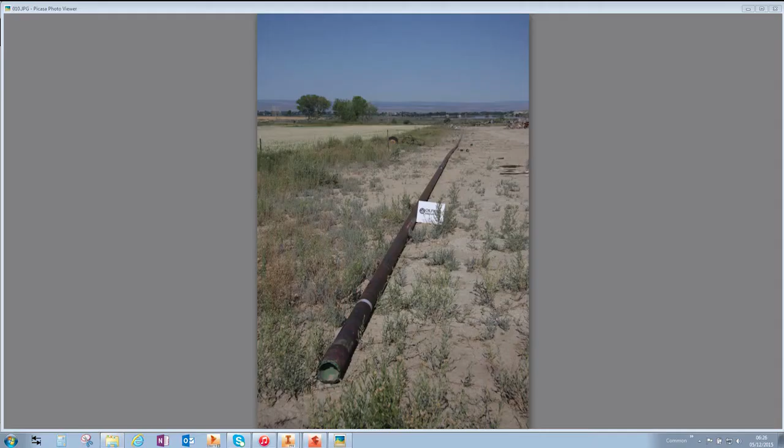We're experts with over 30 years of experience in well operations, and we've patented and tested the worst case downhole tubing disposal situation. We verified our patented method of downhole tubing disposal by crushing and compacting 2 3/8 inch API tubing within horizontal 5.5 inch API casing using equipment you can find at your local garden center. Here we show 5.5 inch casing lying horizontally on the ground.

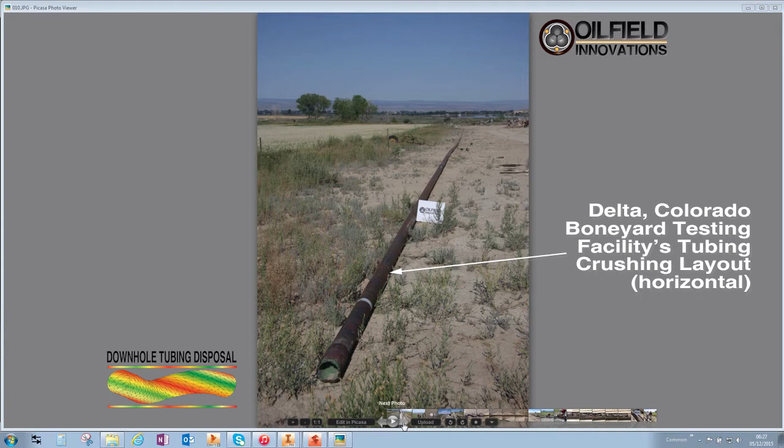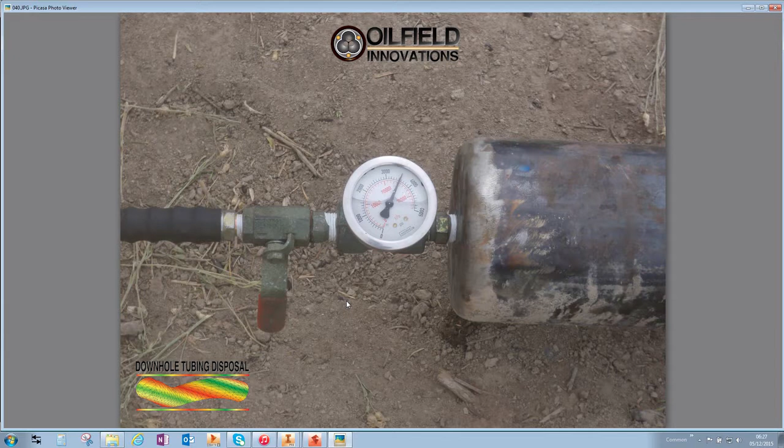The process of verifying our patented method consisted of splitting the tubing, inserting the split tubing into the horizontal casing, then placing a piston and a cap on one end of the casing. We then use an ordinary garden pressure washer to pressurize the casing, push the piston, and compact the split tubing. With a cap holding the split tubing on the other end, we used water to pressurize the piston and crush the tubing using around 3,500 psi or 240 bars of pressure, which was the garden pressure washer's maximum rating.

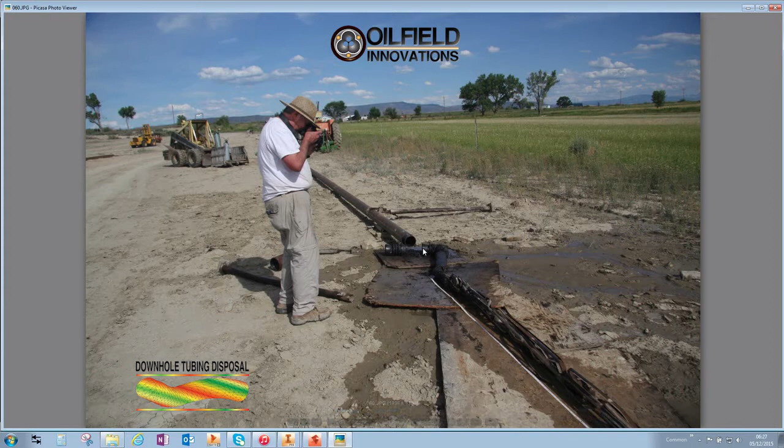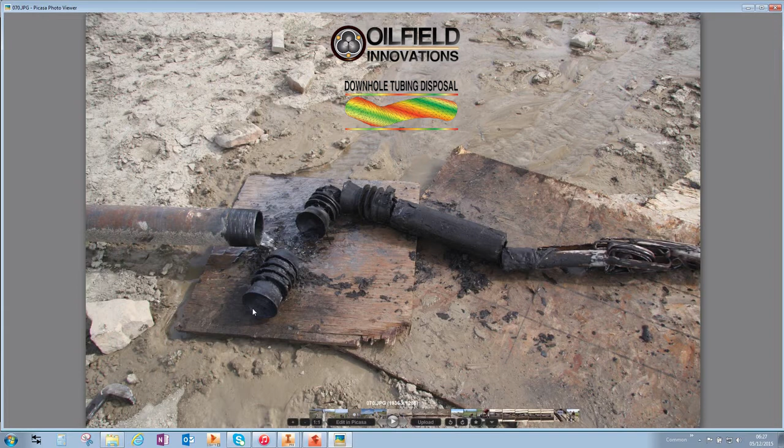Compacting split tubing takes significantly less pressure because you only need to drive one piece of tubing into a lower split piece of tubing. But our garden power washer could not deliver the volume of oilfield pumps, so we let it take its time until it reached the maximum pressure, and then we stopped the process. We then removed the cap holding the tubing and pushed the tubing from the casing by pumping against the crushing piston with the power washer. We used a piece of pipe as a piston and cement wiper plugs as seals behind the piston.

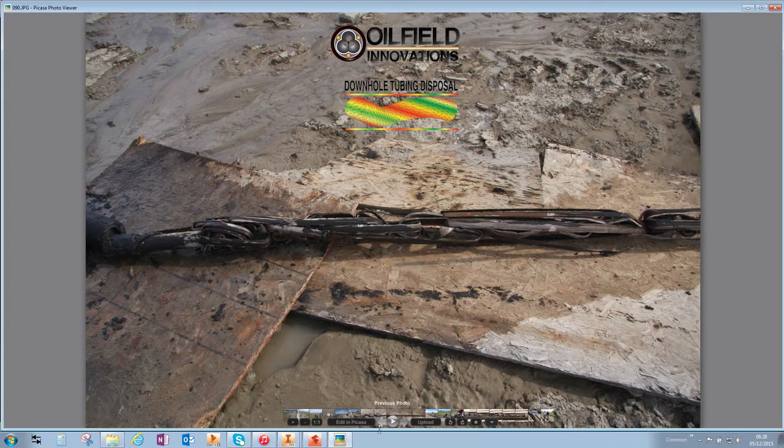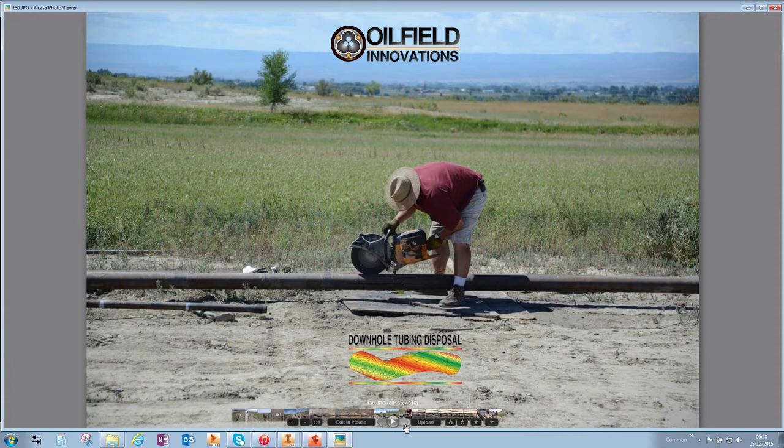We experimented with various tubing splits and determined that after the first split, the compression ratio with a high friction factor of dry crushing horizontally was about 50% compaction ratio using the garden power washer. As the tubing often expanded after being ejected from the casing, we decided to cut a window in one of the specimens to see how it would look downhole within a well. Using a saw, I cut a window in the casing.

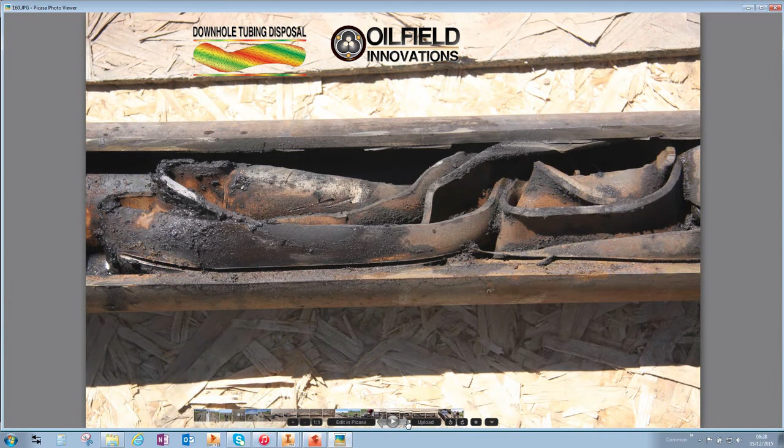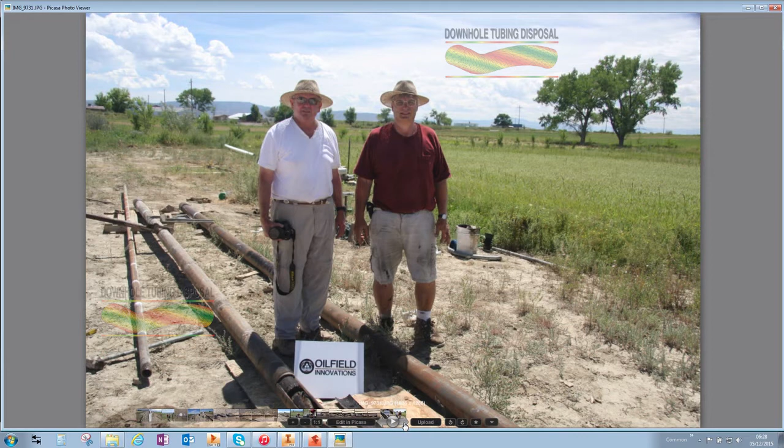As you can see, using gardening tools, we verified our patented method by dry crushing the tubing horizontally, which is obviously the worst case, since compaction will almost always be aided by gravity and an inclined well bore, with well fluids lubricating the compaction process. While alleged experts intent on using or selling the services of a drilling rig may criticize or question our process, you don't have to be a rocket scientist to understand that if you can compact API tubulars in your backyard with gardening tools, it can be more easily accomplished with proper oilfield equipment.

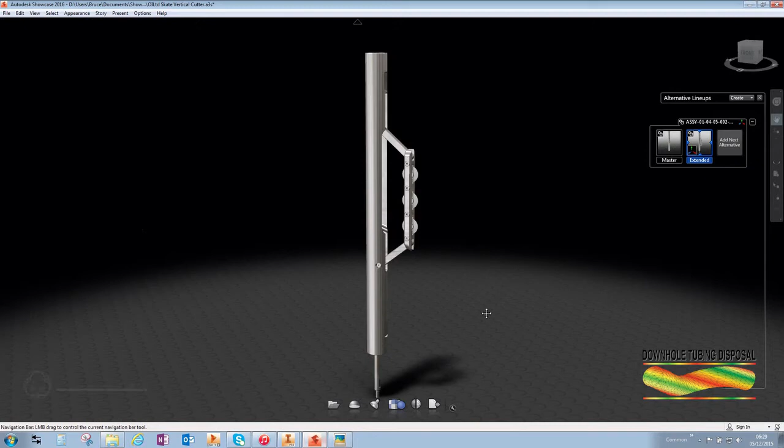Now that you know how easy API tubulars can be compacted after they are split, let's look how we split or shred the tubing or casing downhole. This is our patented skate vertical cutter, which can be lowered into the well, extended, and lifted up and down to split or shred the tubing prior to retracting the cutter and hoisting it out of the well.

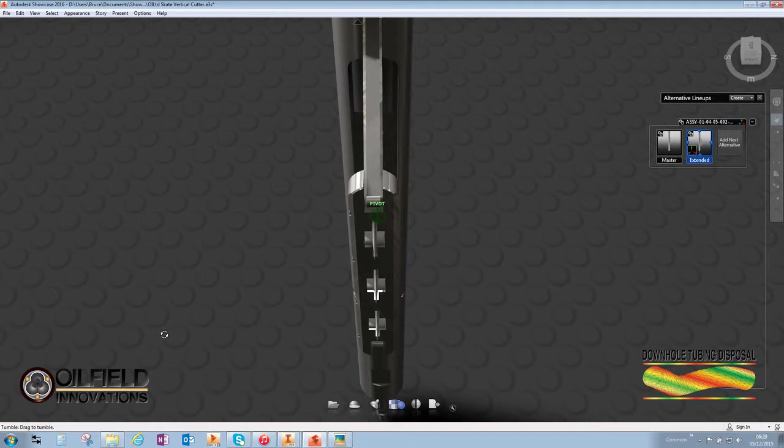At Oilfield Innovations, we use state-of-the-art software to design our patents and tools in a virtual 3D environment. Virtually modeling the tools allows us to see the end product before it is built. It also allows us to run stress analysis to ensure sturdy and robust tools. You can easily see functionality. For example, you can see that pushing the central piston down extends the tool, and pushing the central piston upwards retracts the tool.

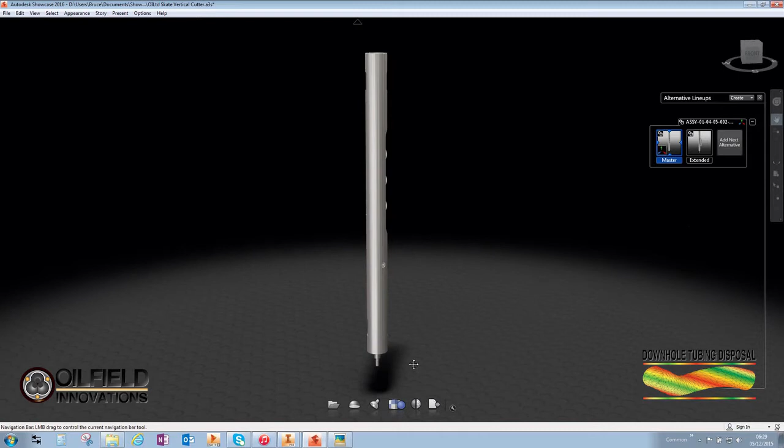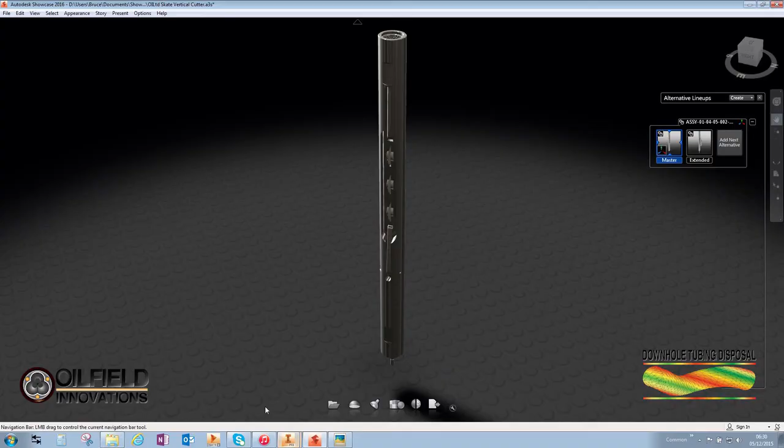Our vertical cutter is designed to be stacked and aligned so that one of these tools can be stacked on top of another, with a central piston extending between the tools. Pushing the top vertical cutter central piston downwards actuates the vertical cutter, and any vertical cutters engaged to the bottom of the upper vertical cutter, whereby when the bottom vertical cutter's central piston is pushed upwards, it pushes and retracts any vertical cutters above it.

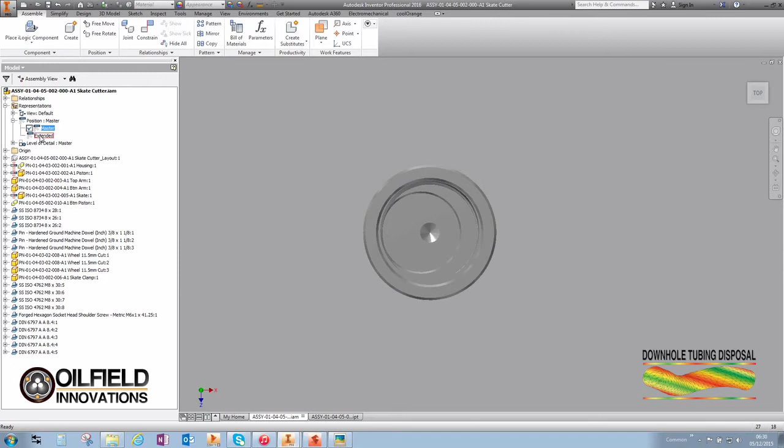We use various high-resolution graphics packages together with Autodesk's state-of-the-art engineering product design suite to model every component of our tool in machining tolerances in 3 dimensions. This 60 millimeter tool is designed to be run on slick lines so it can be extended and hoisted between selected depths to roll cutting wheels capable of cutting any API grade tubular. Now that we've looked at the external part, let's look a little bit more at the internal parts of our cutter.

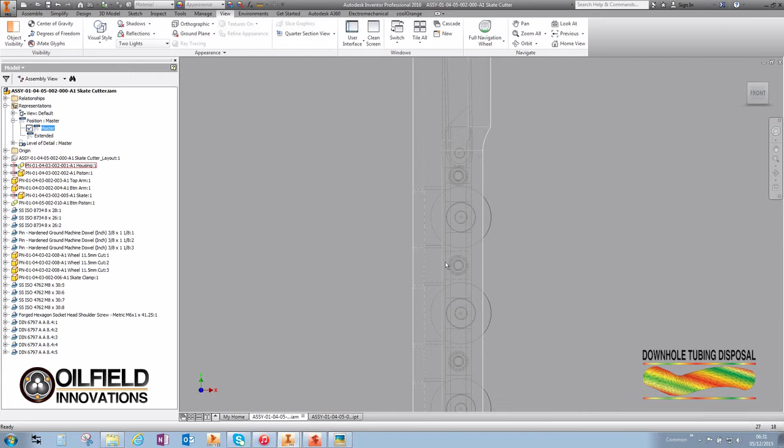Changing a few settings, we can look inside the tool to see how it works. As you can see, it's critical to fit the various bolts and pins between the relatively large 3 cutting wheels. The pins act as axles for the upper arm and the cutting wheel, with an intermediate securing bolt.

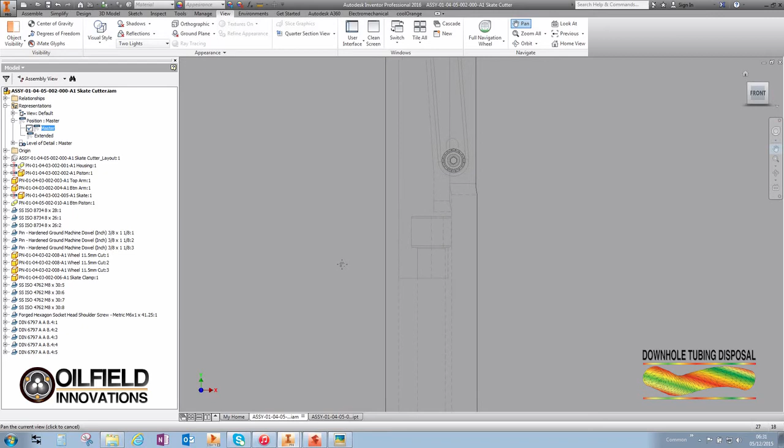Independent larger and smaller diameter actuation shafts within the cutter allow makeup of the internal shafts prior to making up the larger diameter threads of the housing. The lower, smaller diameter actuation shaft slots into the larger diameter skate actuation shaft to allow independent rotation and makeup of the internal series.

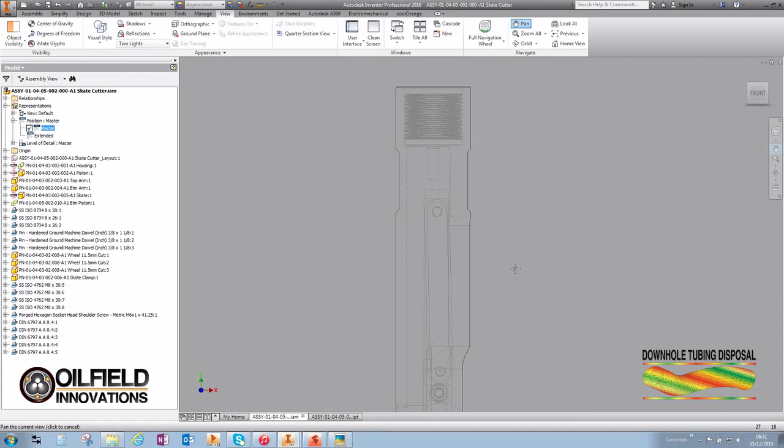The lower arm of the skate is secured between the skate actuation shaft and the cutter's housing, while the upper skate arm is secured between the skate actuation shaft and the skate. An upper actuation shaft from either the spring drive actuator or another vertical cutter screws into the skate actuation shaft, which is pushed downwards to actuate the vertical cutter and engage the cutting wheels to the tubing or casing.

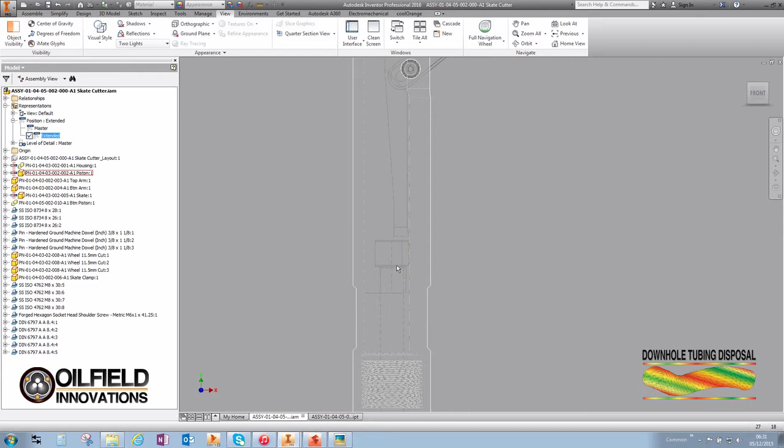During assembly, the skate shaft and upper arm are inserted into the housing prior to extending the upper arm to attach the skate and lower arm, which is secured to the housing via a bolt. With the skate extended, the lower actuation shaft extends from the housing for connection to the next part of the assembly and can be rotated independently via a slot connection.

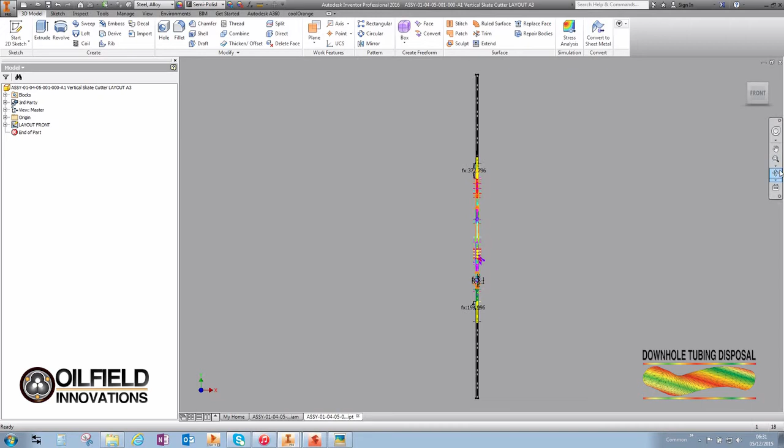Underneath the high-resolution model are layouts with tolerances and dimensions for the entire skate vertical cutter assembly to accelerate the development process. Here we have modeled a third-party tool that can be used to actuate our spring drive system downhole. Compression springs within our spring drive actuator are compressed by the third-party tool so that the skate cutter is extended by a constant controlled spring force.

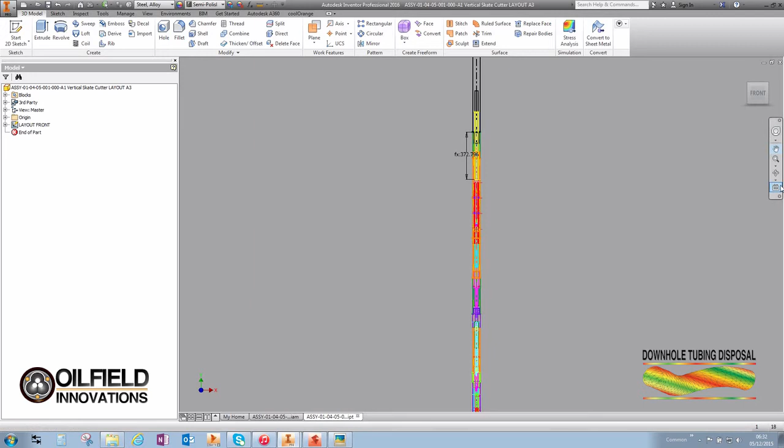Let's look at the springs of the actuator, which is shown here in red. When our cutter reaches the desired depth, the third-party tool compresses the springs. Like all slickline tools, we use a shear pin which is severed by the third-party tool to release the compressed springs and extend the cutting skate.

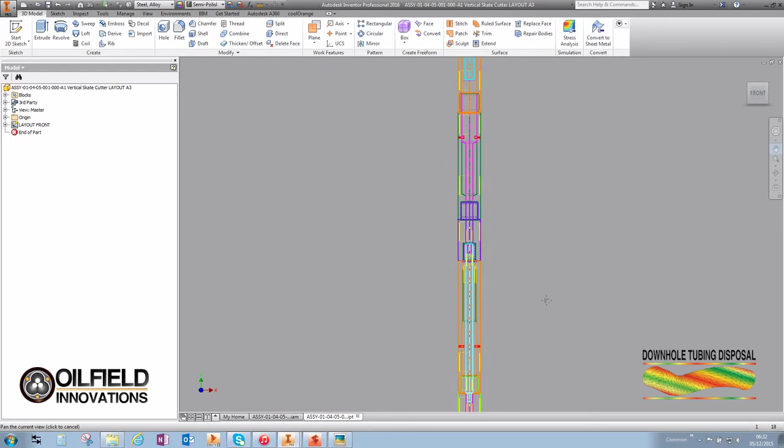A second third-party tool is used to retract the cutter skate after a specified time by recompressing springs until the second shear pin is severed. The weight of the bottom hole assembly can then be used to retract the skates and relax the compressed springs for easy disassembly. Hoisting the bottom hole assembly up and down rolls the cutting wheels to cut the tubing or casing. The cutting depth can be controlled by the diameter of the cutting wheels.

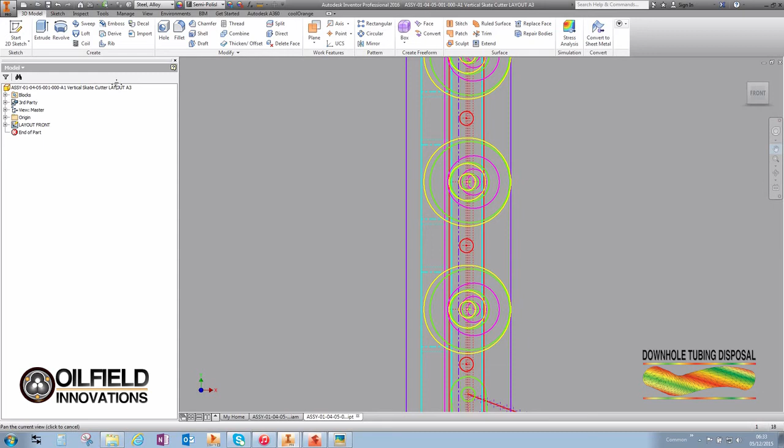The skate can use small diameter cutting wheels, shown in magenta, or larger diameter cutting wheels, shown in green, up to a maximum diameter cutting wheel, shown here in yellow. We use dynamic modeling software so that we can see exactly how parts move. Even layout models can be moved to test functionality. As you can see, we can automatically or manually simulate movement.

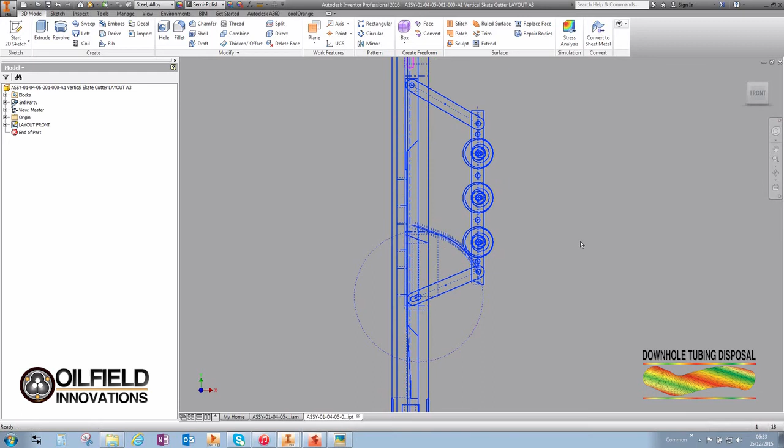Using the dynamic modeling, we have designed a swivel connection that can be used to orientate stacked skate cutters and ball bearing rollers that can be used to let the string rest on the lower side of the well so as to orientate the cutters if multiple cutting runs are required.

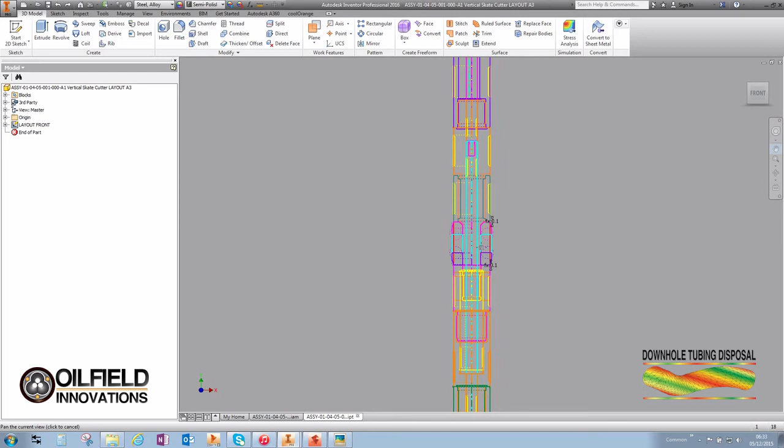Conventional go-devils can be used on the ends of the bottom hole assembly, or we can use our orientation roller swivel between skate cutters to orientate different skates and provide ball bearings to support the skates when they are hoisted during cutting. You can see the ball bearing rollers here just above the retraction crossover.

Conventional third-party tools can be used to actuate the skate, and the second tool can be used on a timer to deactivate the skate after a specified cutting period. Actuation pushes the central shaft downwards. Deactivating our vertical cutter and retracting the skate simply requires pushing and compressing the actuation springs to retract the skate and shear the release pin so that both the springs and the tool string weight can be used to retract the cutter skate and pull the slickline tool string from the hole.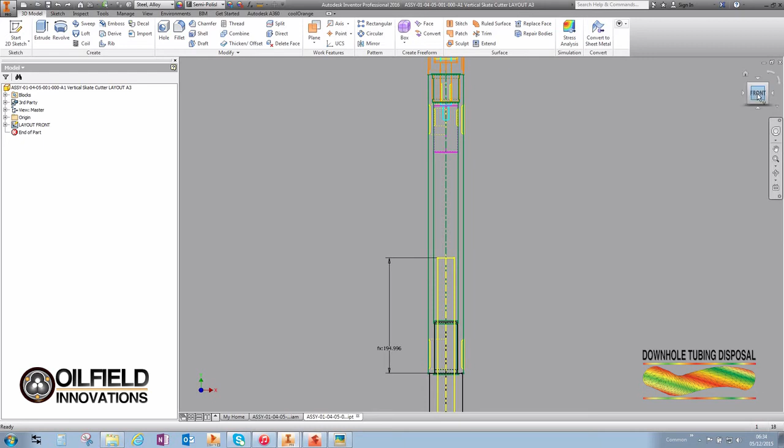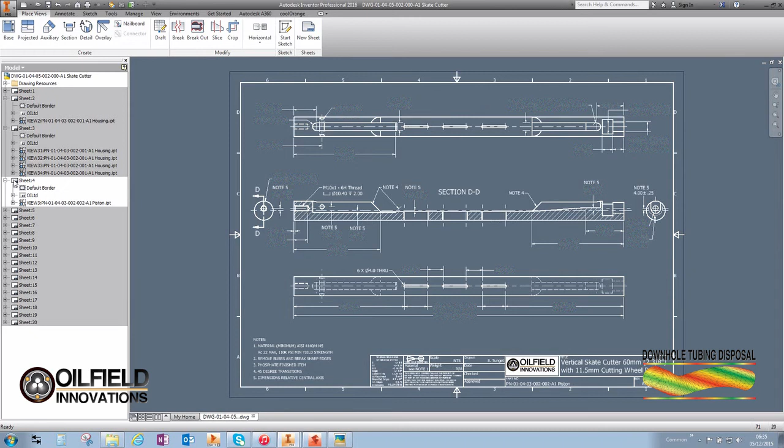Ultimately, the purpose of simulation is to provide robust machining drawings so as to make the tooling necessary for low-cost downhole tubing disposal and well abandonment. While we have blurred the dimensions for proprietary reasons, the simulations which you have witnessed in this video have all been incorporated via state-of-the-art software into these drawings. The skate activation piston is shown here.

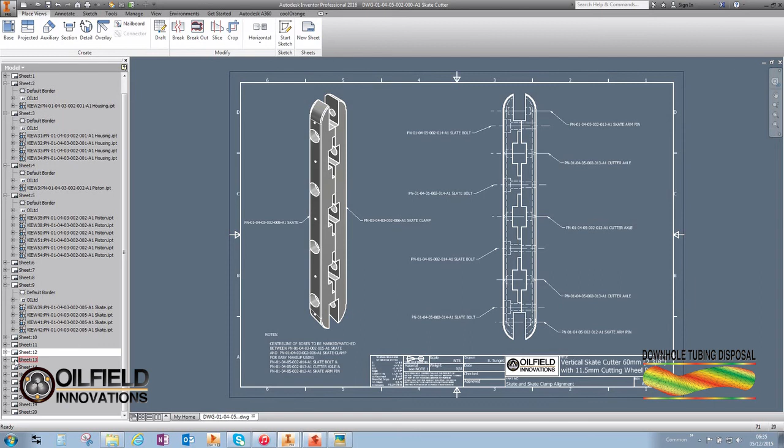The skate arms are shown here. This is the skate and the opposite skate clamp. This is the skate and the skate clamp together. The lower central actuation piston, the cutting wheel, and the axles, and the bolts, and the lock washer associated with clamping the skate together.

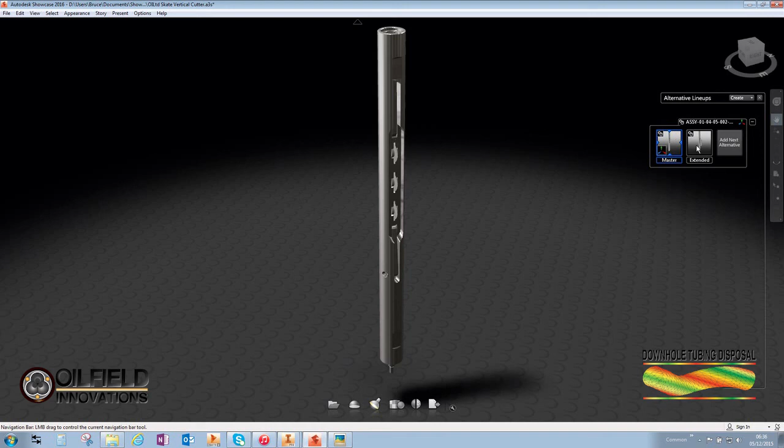We are a small company, but hopefully we have made it clear that Oilfield Innovations has the necessary technology and experience to deliver. Our employees are experienced professionals. We're fully versed in all existing technology and have patented simple methods and technologies for reducing the cost of disposing of tubing and casing downhole during, for example, suspension or abandonment.

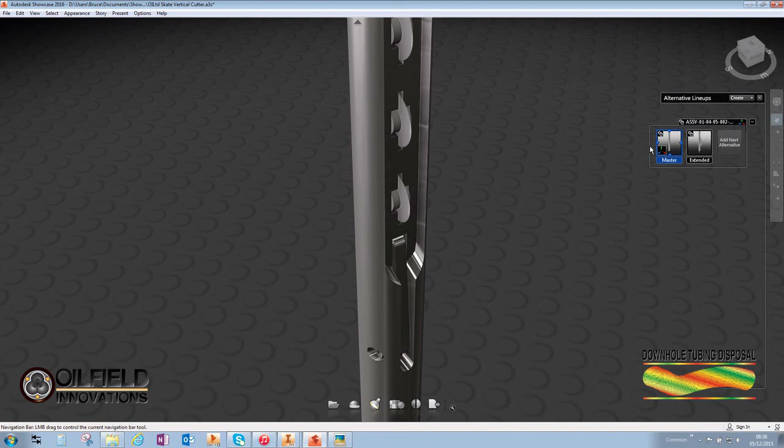If you are a service company who wants to be part of the technological revolution, or if you're an oil and gas operator that wants to reduce the cost of plugging, suspending, and abandoning wells, we have the answers, and we can show that the cost of developing our technology can be recovered within the first few wells, regardless of whether you're an operator or a service company.